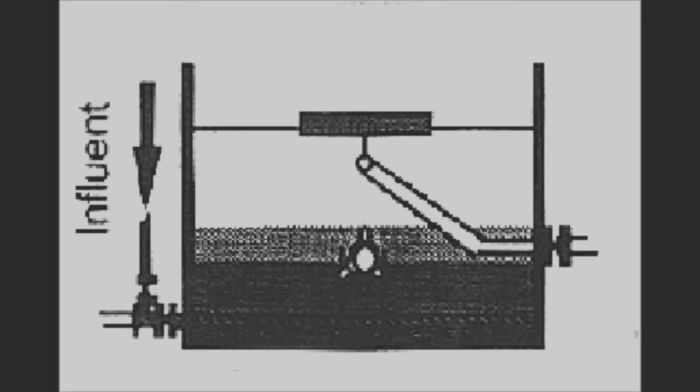Let's get started with the fill phase. Wastewater is fed at a low rate until the tank is full. Typically, ASBR is operated in zero-order kinetics.

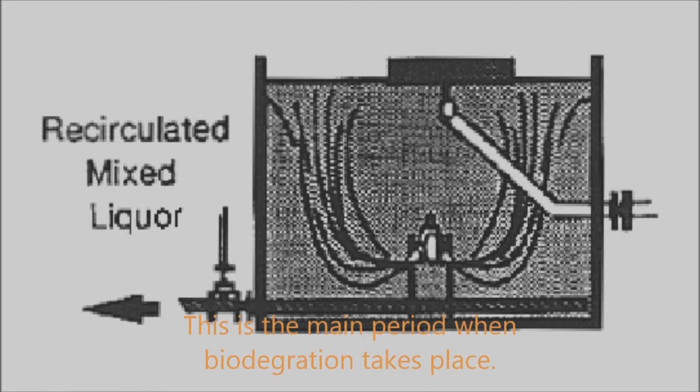Next is the react phase. This is the main period when biodegradation takes place. Mixing is provided to ensure sufficient contact of the microorganisms with the substrate. During this phase, some microorganisms will die because of the lack of food. This will help to reduce the volume of settling sludge.

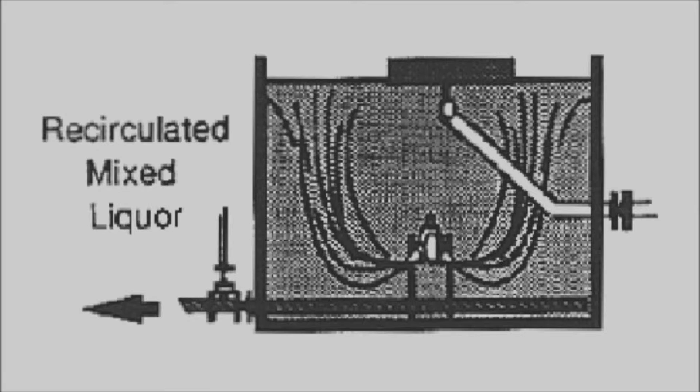The third phase is the settle phase. Solid-liquid separation is allowed to take place by gravitational force. There is no liquid entering or leaving the tank. This is to avoid turbulence in the supernatant.

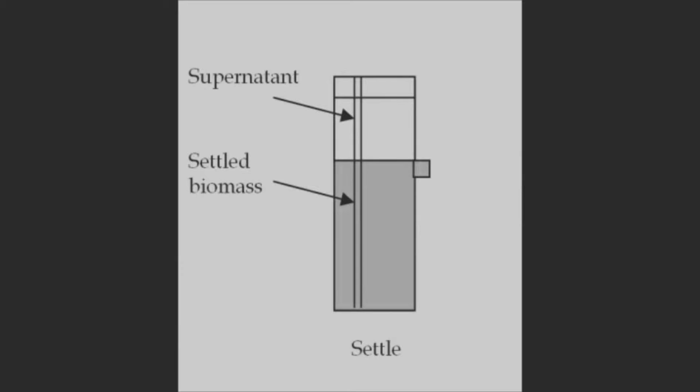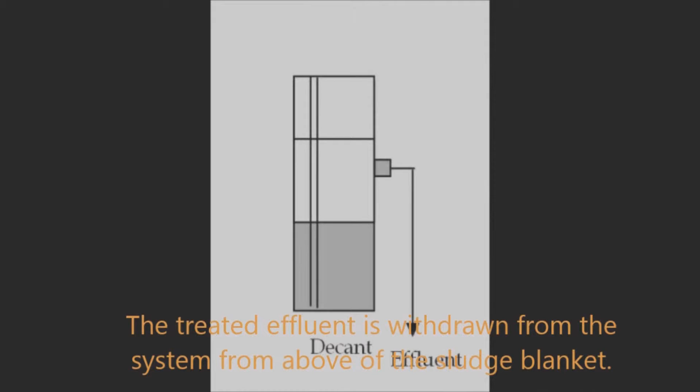The fourth phase is the discharge phase. The treated effluent is withdrawn from the system from above the sludge blanket. It is usually done at a slow rate to minimize disturbance of the settled solids. This is the animation of how the anaerobic sequencing batch reactor works.

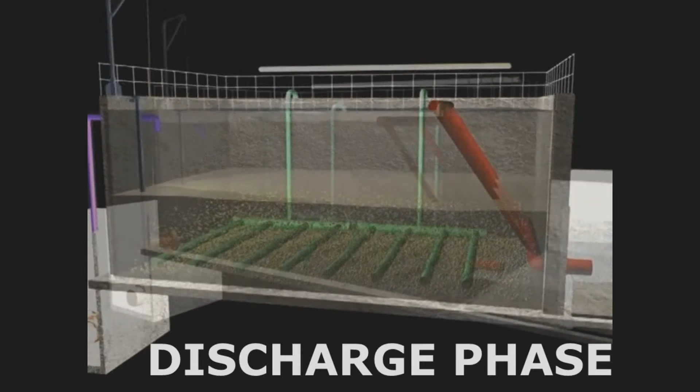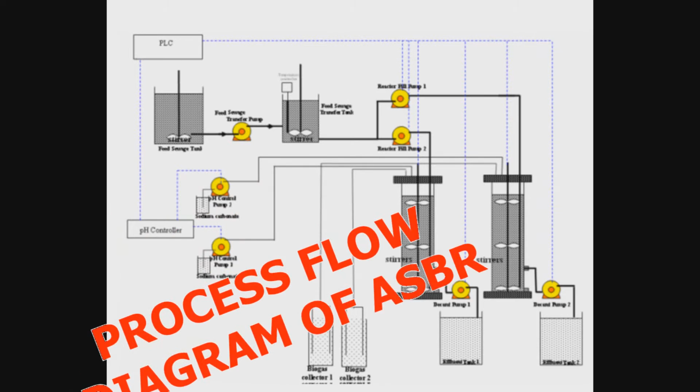Last but not least is the idle phase. The idle phase is an optional phase which may or may not be incorporated into a system. So that's all. This is the process flow diagram of ASBR.

Every reactor has its own advantages, and the same goes for the anaerobic sequencing batch reactor. The first advantage of the anaerobic sequencing batch reactor is lower production of biomass per unit of organics removed. The second advantage is no aeration required. Aeration means the process by which air is circulated through, mixed with, or dissolved in a liquid or substance.

The third advantage is lower requirement for inorganic materials such as phosphorus and nitrogen due to lower biomass yield. The fourth advantage is anaerobic systems can be left dormant without feeding for extended periods without severe deterioration in biomass properties. This means that they can be brought back into service at normal treatment efficiency within a very short period of time.